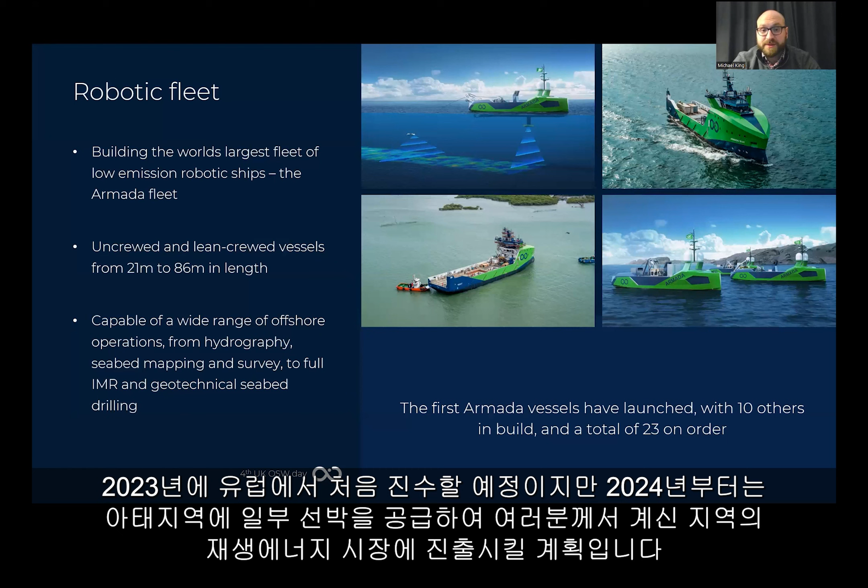The first of these vessels have now launched. We've got 10 others currently in build and a total of 23 vessels on order. They'll initially launch in Europe in 2023, but by 2024 we will have some of these vessels in Asia Pacific for the local renewable market where you are.

As you can see here, they look largely like normal ships - they have a pointy end, a flat end, a wheelhouse and a back deck. But really these ships have been designed from the ground up. They are completely custom built to fit our specifications exactly, with different technology on board, different control systems, different communication systems and IT infrastructure.

This enables us to go from what we see today, a picture with maybe 30, 40, 50 people on a vessel of this size, through to our lean crewed model operating later this year. These 78-meter ships have a maximum complement of 14 people, already a dramatic reduction compared to a conventional vessel of that size. Of those 14, most are involved in operating the vessel itself. The regulations won't allow us to operate without any people on board yet.

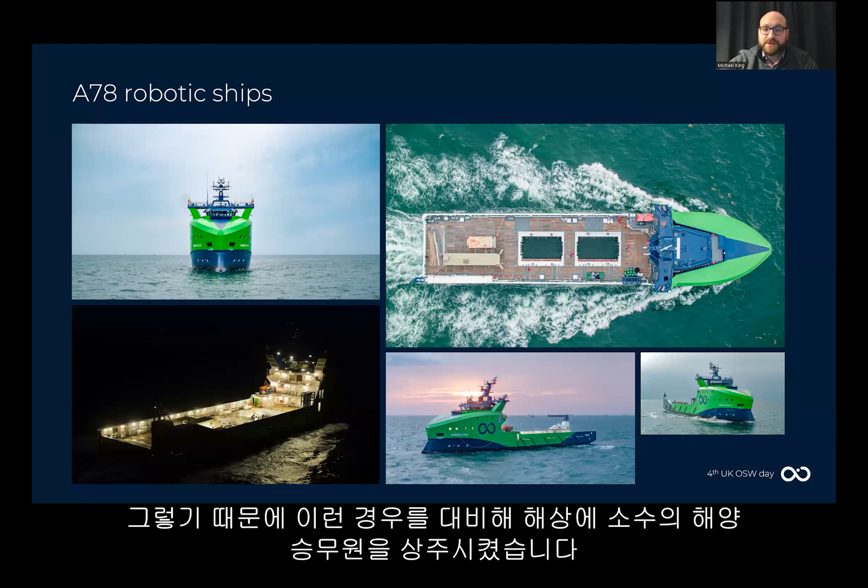So we have a small marine crew offshore to help with those tasks. However, all of the payload control, data sensors, and vehicles deployed from these ships will be controlled from one of our global remote control centers. Even though these are lean crewed rather than uncrewed, we'll still have people offshore for a while. There is a dramatic step change in offshore exposure hours, which yields less HSE exposure, but also more efficiency throughout the whole project.

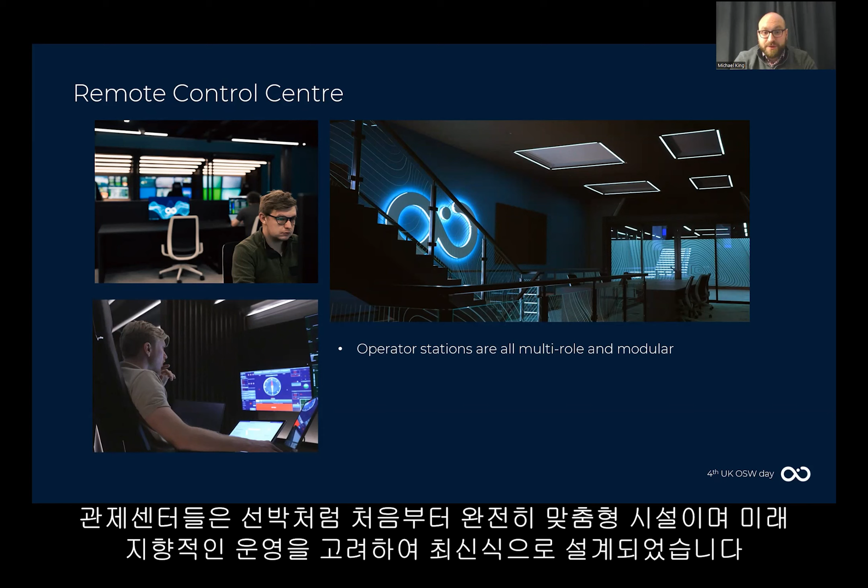So I touched on those remote control centers - we're building a global network of these. We already have one in the UK, based in Southampton on the south coast, supporting our European operations. We're also going to build one in Asia Pacific over the next year. These control centers are completely custom built from the ground up, designed with futuristic and future-proofed operations in mind.

All of the operator stations and control stations are completely multi-role and modular. We didn't want a situation with one chair for a vessel pilot, another for a surveyor, and another for an ROV pilot - we wanted all stations to be completely multi-role. They run on a completely virtual network, allowing access to multiple systems from a single station, so people working in these environments can access all the different data flows they want in real time.

It means that people who are responsible for data processing and data quality can access all the different information without having to switch computers. It means that the vessel pilots and the ROV pilots can access different views and different sensors without having to worry about the compatibility of all of that.

Ultimately, human factors have been at the absolute forefront of the design process throughout. Even the temperature, the colors, the textures, everything in that room has been designed to facilitate the best working environment for our personnel. We believe our personnel are going to be spending a long time in these rooms, providing detailed support to complex operations, and we want them to be as comfortable and as healthy as possible.

However, it does bring its own challenges. When you're trying to combine detailed, complex vehicle and data operations with a remote control center technology stack, you have to really build in the opportunity to link those technology stacks through satellite communications.

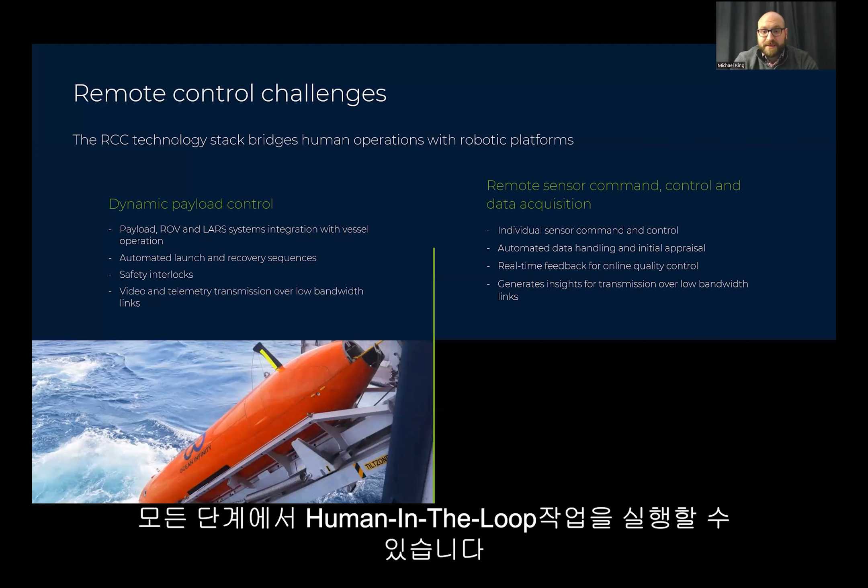So firstly, we have what we call dynamic payload control. These payload controllers allow us to operate geophysical sensors, ROV, and LARS systems integrated with vessel operations at every stage. We have automated launch and recovery sequences for different towfish, for different vehicles, both subsea and aerial. And we have all of the safety interlocks that you would expect to mean that we have complete human-in-the-loop operations at every stage.

The video and telemetry transmission over low bandwidth links is a challenge, but the way in which we're building our control system will allow us to provide real-time data insights from our remote control centers. So the days of sending client reps offshore and having to wait for feedback and having to wait for data to be transmitted back to an office or a facility is over.

We can give real-time access to a lot of the data that we're acquiring from the comfort of one of our remote control centers. That will really enable you to get data earlier in the process to inform other projects. And then the second part of it is actually about the sensor command, control, and data acquisition.

So we have the dynamic payload control that handles the physical devices, the physical sensors, and the physical vehicles. But then the sensor command and the data acquisition is yet another challenge that we have with this remote setup. So we need individual sensor command and control. We have to be able to look at the different acoustic, geophysical, and hydrographic sensors that we're operating.

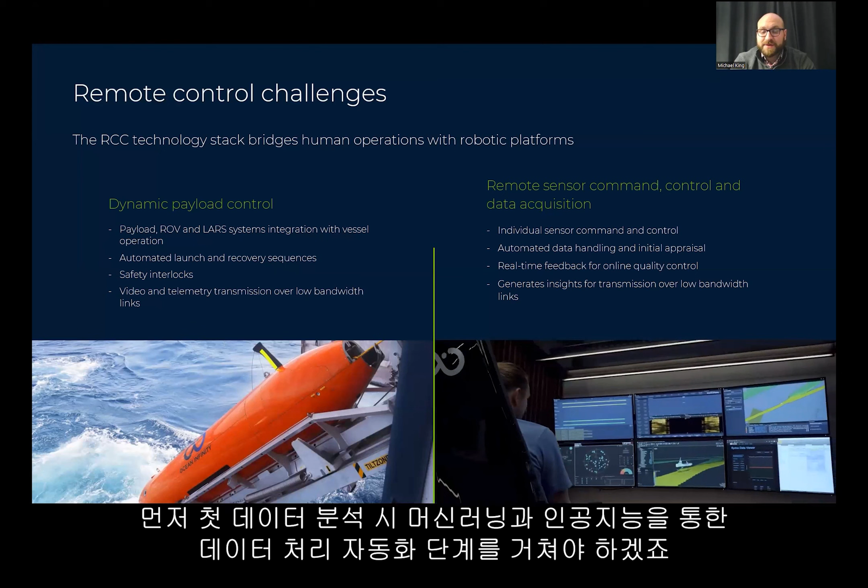But we need automated data handling and initial appraisal by machine learning and by artificial intelligence so that we can provide that real-time feedback for online quality control. You can't operate over a low bandwidth, high latency link and expect data in real time without giving a certain amount of thought to machine learning.

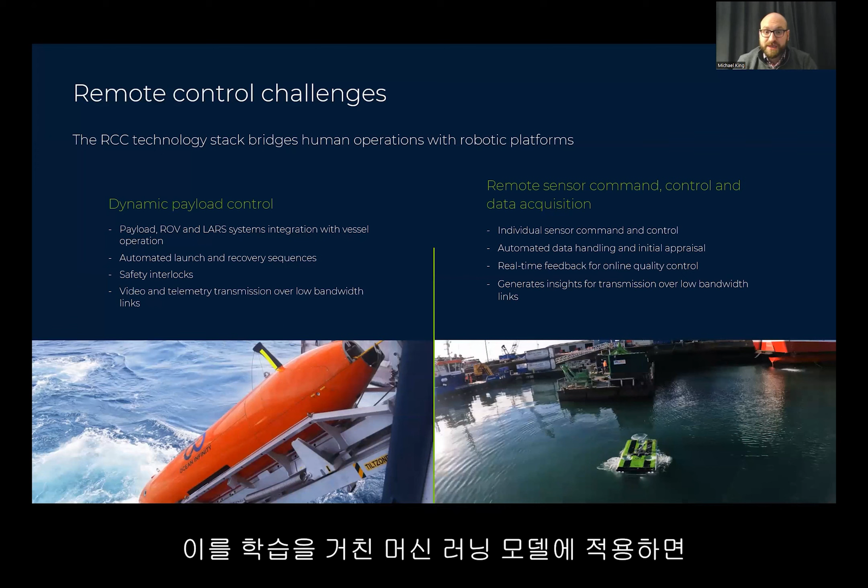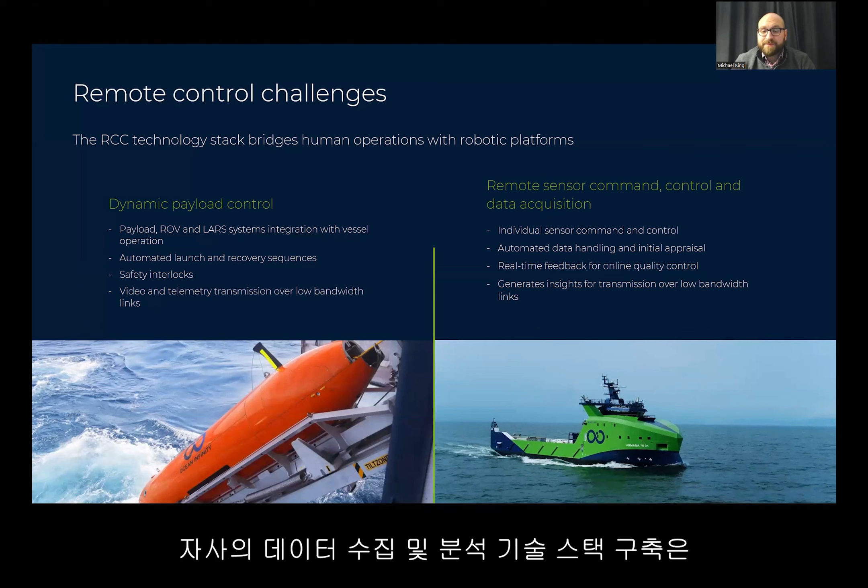So if you can take a complex data set and put it through a practiced machine learning model, and you can then start gaining insights straight away before a human has ever seen the data, then you get even faster access to that data over that low bandwidth link. So the way in which we're building our data acquisition and data analytics technology stack really supports that kind of operation.

Moving on from the actual data acquisition itself, the requirement for absolutely vast amounts of data in offshore wind is becoming ever more prevalent. The amount of geophysical and hydrographic information that is acquired when you're doing surveys for offshore wind stretches into the tens or twenties or thirties of terabytes.

And hosting all of this information, appraising all of this information, and analyzing all of this information is really vital to the whole process of site characterization for offshore wind. And we're trying to innovate not only how we acquire the data through our new ships, but also how we handle and manage that data through its journey right through to the deliverables.

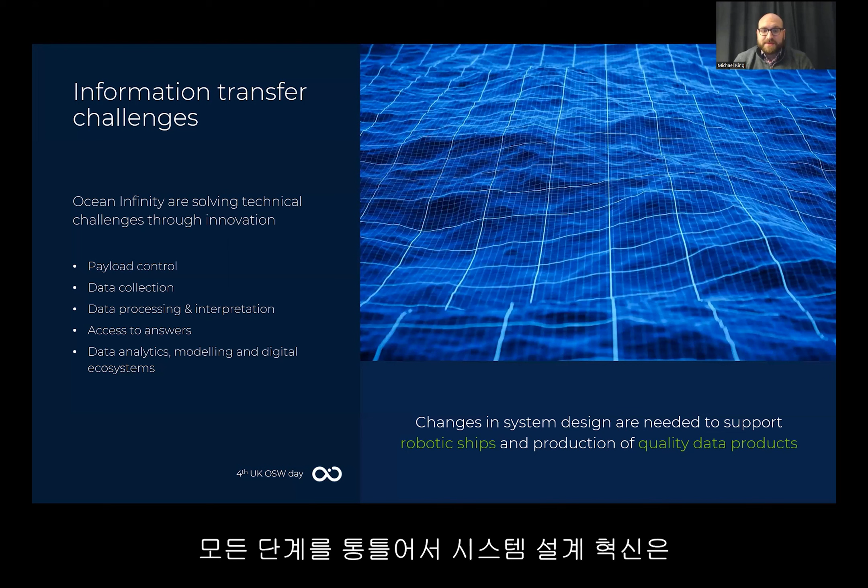So we are innovating payload control, data collection, data processing and interpretation, and really giving our clients and our stakeholders access to those answers and the data analytics and the models much earlier in the process. And throughout all of this, it's important to remember that changes in system design are needed to support our robotic ships and our remote operations in order to help us provide quality data products.

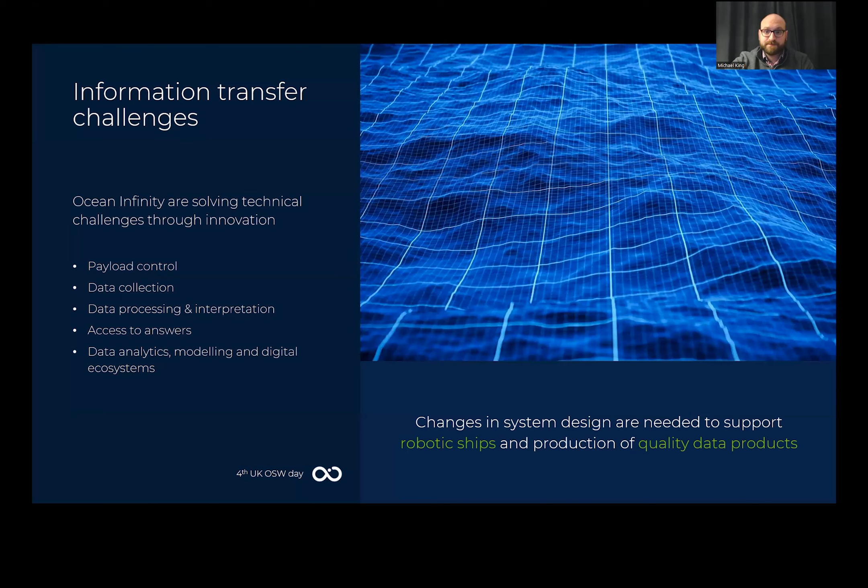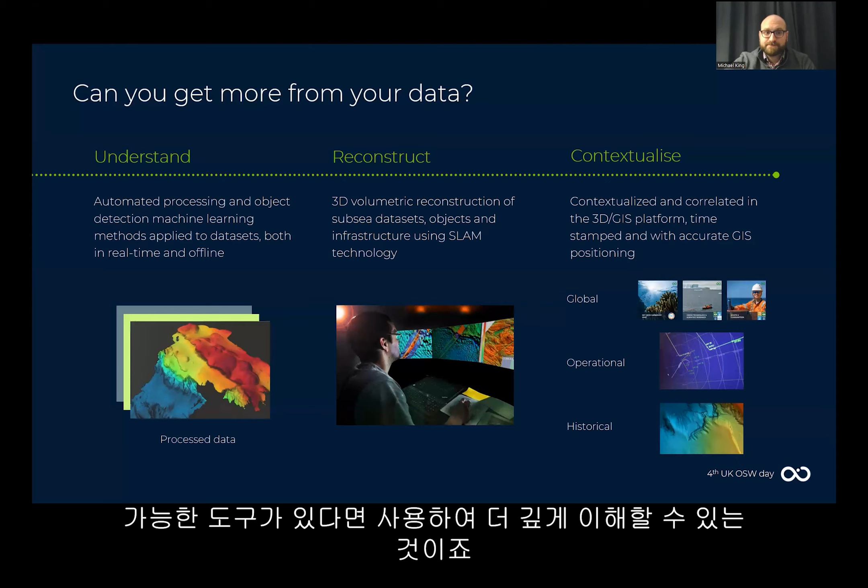Obviously, we're a technology-driven business. We are building and developing and bringing a lot of our technology to market. But really, that's just the start of what we're doing. We have more ships in build, and we have more machine learning and more artificial intelligence to come, which will support our operations and our data analytics.

But we also want to challenge the rest of the industry to work with us on this. We challenge our suppliers to deliver more advanced equipment and more advanced sensors so that we can take even more information from a data set. We want to build even more intelligent ships of lots of different sizes for lots of different things. We want to provide smart shipping and cargo movement and everything that ties us together as a genuine provider of marine robotics. Everything ties together in a single technology stack to enable really efficient and really clever data analytics across a range of different industries.

Of course, at the moment, the majority of what we do is for offshore renewables around the world. However, we believe that as renewables in Asia Pacific, for example, get built out, and as the wind farms start to appear, our technology and our technology roadmap will enable us to provide services across the life cycle of an offshore wind farm, from cargo movement to O&M services right through to decommissioning. And it will enable us to provide even more sustainable solutions as we move forward into the future of offshore wind.